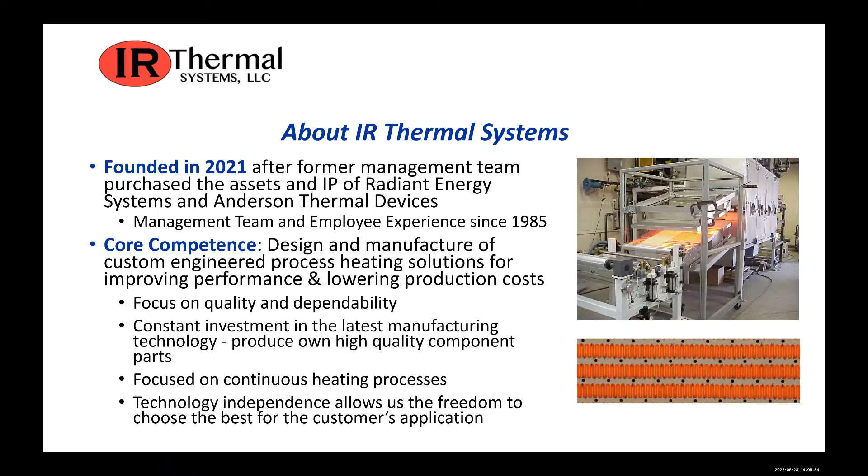Our core competence is the design and manufacture of custom engineered process heating solutions for improving performance and lowering production costs. Our focus is always on quality and dependability for our customers. We constantly invest in the latest manufacturing technology and produce many of our own high quality component parts, which we found is critical to control quality. We focus on continuous heating processes, and the big difference between us and other companies is that we're truly technology independent, which gives us the freedom to choose the best heating technology for the customer's application.

So how do we help with custom process heating solutions? We focus on preheating, drying, and curing applications. We do hot air systems, IR systems and heaters, and combination hybrid IR and hot air systems. For our customers, we increase line speeds, reduce energy costs, and save space, particularly with our infrared solutions. We also do a lot of troubleshooting, leveling out uneven temperature or moisture across a web, and heat selected zones across the web when we want to improve the performance of existing heating systems.

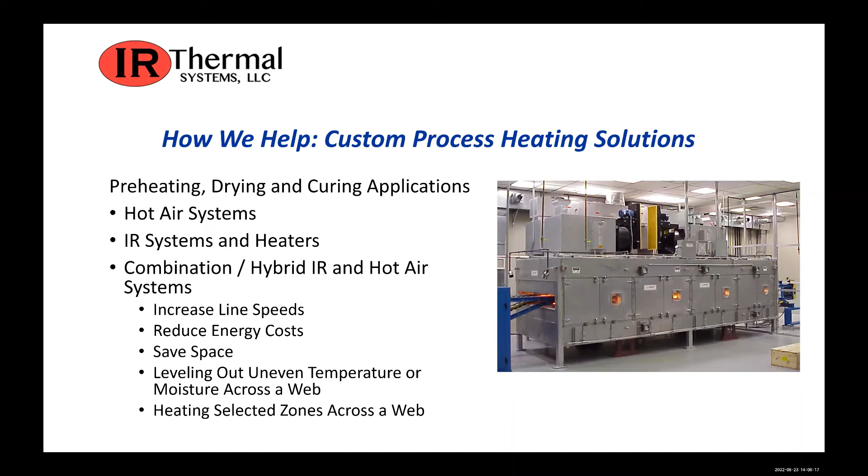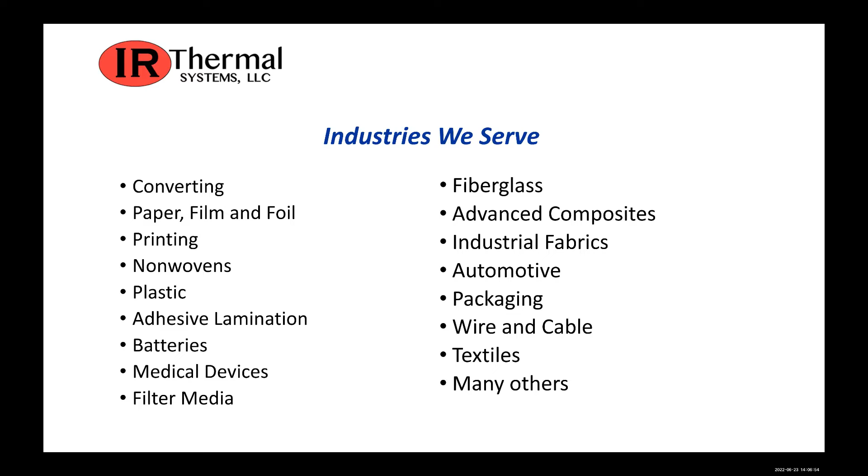So we serve a wide range of industries: converting, paper, film and foil, printing, nonwovens, plastic, adhesive lamination, batteries, medical devices, filter media is big for us, fiberglass, advanced composites, industrial fabrics. We have many automotive applications, packaging applications, wire and cable, textiles, and many other applications. So we serve a wide range of industries over the 35 years that we've been in business, and we certainly can help solve a lot of application problems.

So how we work with your team: we have a crew of specialized engineers that review your existing process. We determine the best technology to use to meet your goals. With state-of-the-art design tools, we develop a system tailored to meet your target specifications. We also have our popular low-cost infrared rental program that allows you to try our technology in your plant, especially since with infrared, you want to tailor that solution for your application. This allows you to do that at a low cost.

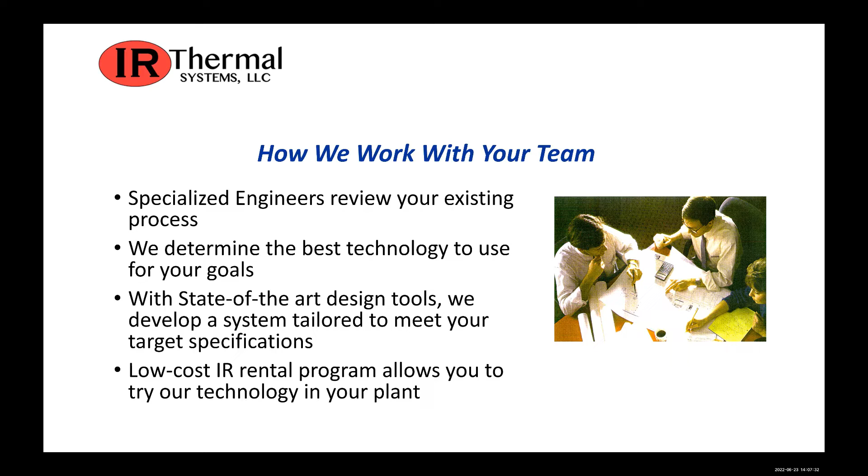We also have project specification sheets that are developed for each type of application. We provide those to our customers to give us all the information needed to properly specify a heating system.

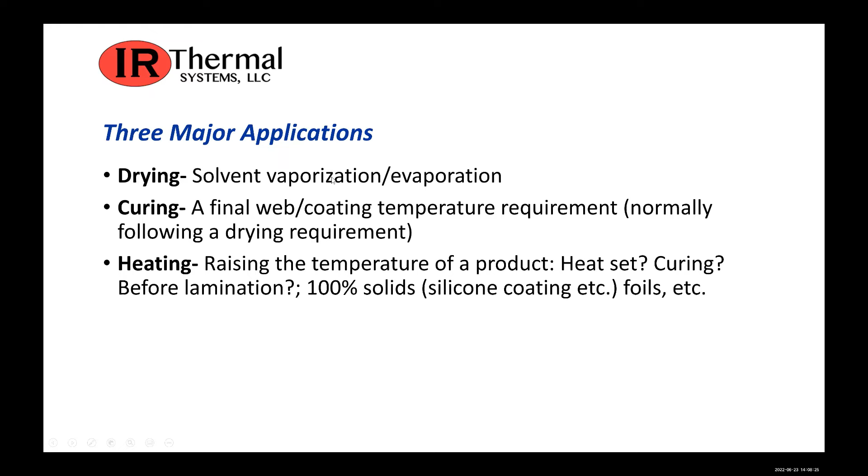So once again, our three major applications: first is drying, so solvent vaporization or evaporation of water. Second is curing, the final web or coating temperature requirement, normally following a drying requirement to cure some sort of chemicals on a web. And third is just basic heating, raising the temperature of a product, maybe for heat set, for curing, before lamination, or just to heat 100% solids or foils.

So let's look at the range of drying methods that we have available. For convection hot air systems, we focus on impingement dryers, flotation dryers, and through air dryers. For radiant heating and infrared systems, we do both electric infrared and gas-fired infrared. And of course, one of our specialties is combination infrared and hot air systems. So in our opinion, each technology has their advantages and disadvantages, and since we are technology independent, we are free to choose which is best for your application.

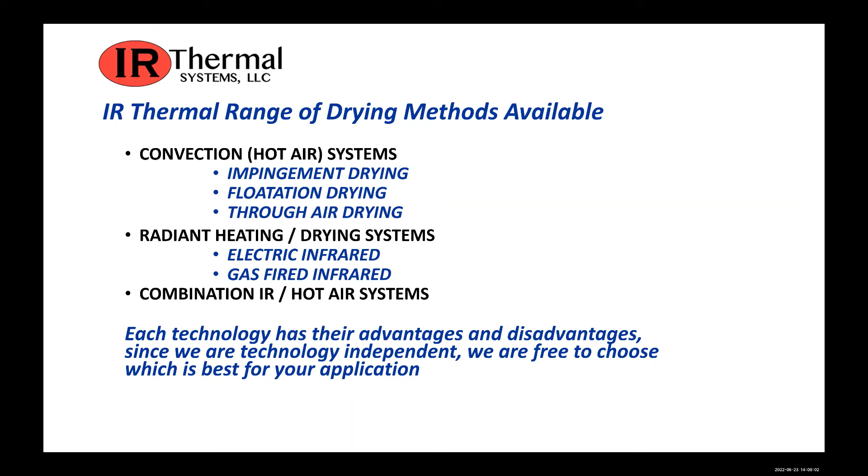So let's start with the different drying methods, just as an introduction.

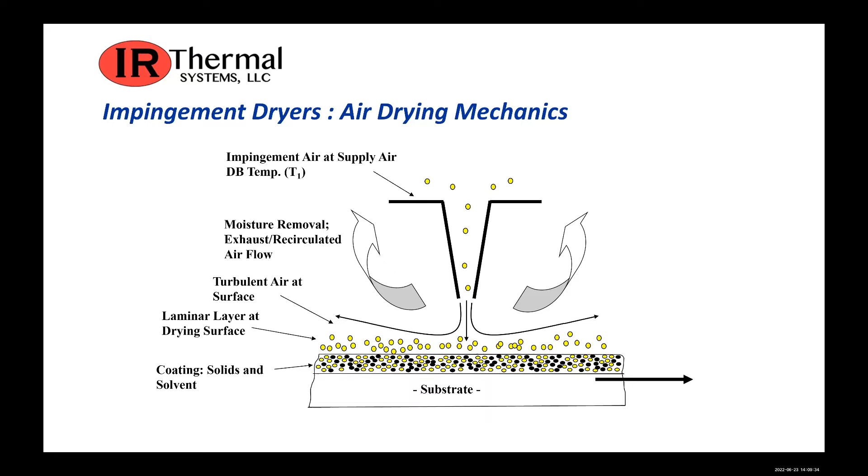The first are impingement dryers. You can see there on the screen how they work. You have these impingers that are basically blowing hot air onto the substrate, onto the web. You have a turbulent air at surface and a laminar layer at drying surface that heats up the web. Air is blown through a nozzle to heat one or both sides of the web. It's typically used for coated and non-permeable webs, such as adhesive tapes, protective films, coated fabrics, architectural fabrics, and other printed materials. It can be easily arranged for multiple heat transfer zones and adapted to different product requirements, and this technology gives you an accurate and uniform control of the dryer temperature.

A couple other aspects that could be seen as disadvantages. This method does require roll or conveyor support, along with the associated initial costs, maintenance issues, and web tension requirements for longer dryers. So there's equipment that you have to maintain with this process. You have the possibility of web scratching or marking from contact with the web support idlers, and it's also slower to heat up or cool down.

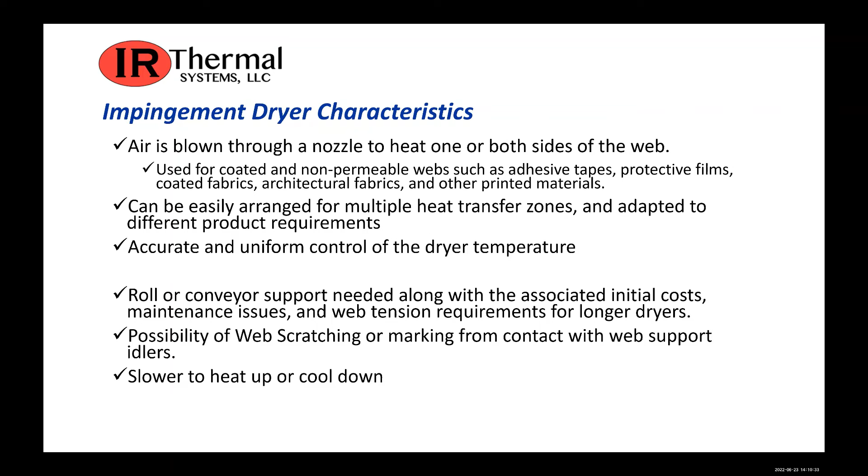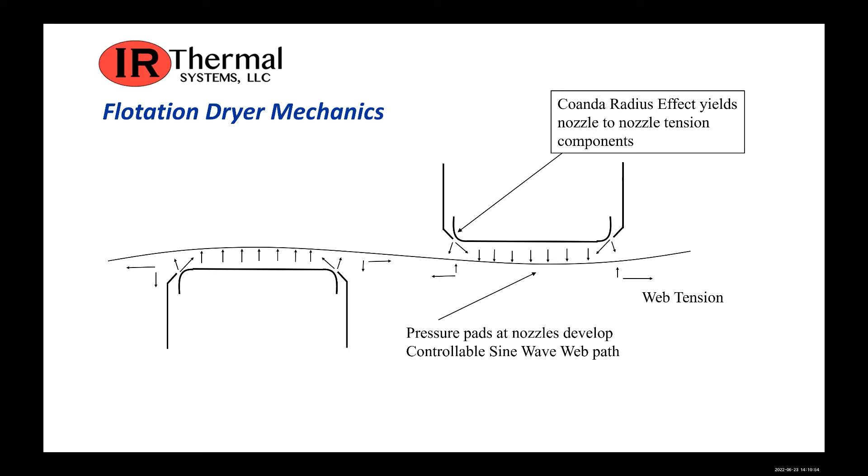The next are flotation dryers. Flotation dryers are a little bit different because the technology allows the web to be transported through the dryer without contact, like a non-contact drying system. So you have some specific advantages to this type of dryer. Flotation dryers direct heated air at the product from both sides, producing more effective heat transfer rates per running length of the dryer. It's used where the web is coated on both sides and for delicate webs that can't be mechanically supported or touched, including filter media and coated film.

Non-contact web support eliminates issues with marking or scratching and eliminates the need for support rolls or a conveyor system. That gives you some cost savings there - accurate and uniform control of dryer temperatures and ease of multi-zone operation. So for most applications, two-sided nozzles with balanced airflow are needed to stabilize the web. That results in a higher dryer cost, offset by the elimination of rolls and reduced overall dryer length. So you also reduce the maintenance of not having all of that conveyor to manage.

You have lower rates of unit area transfer versus velocity compared with impingement, and a lowered velocity and flow balance required to float and minimize the sine effect against low line tension may limit the heat transfer. So some of these might be a little bit longer.

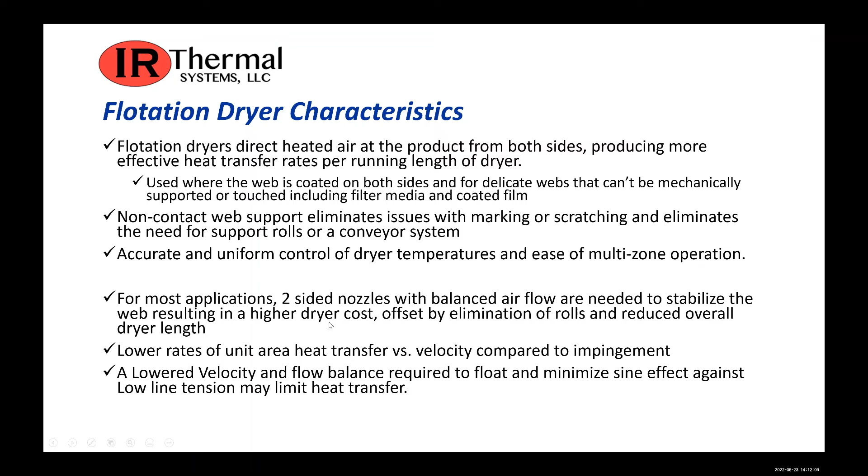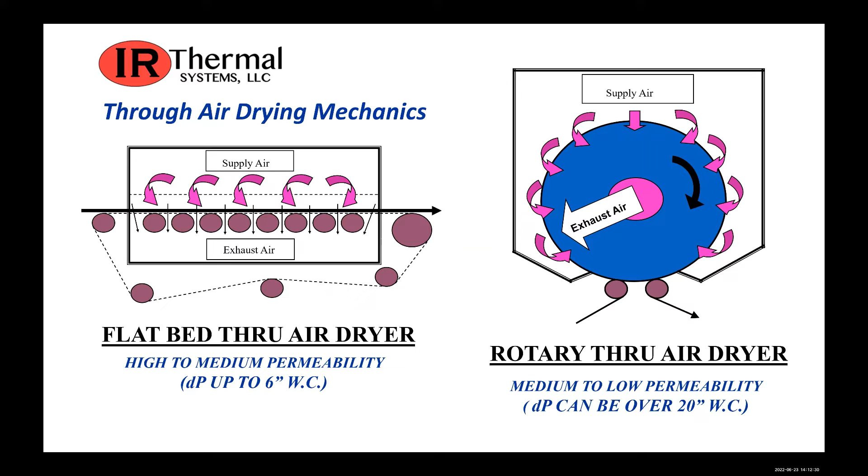We also have through air dryers. We have rotary and flatbed types. This is typically for webs that require the heated air to be pushed through the material itself, and that's what it's normally used for - drying, curing, heat setting, and thermal bonding of porous materials such as nonwovens, textiles, paper, and fibers by the passage of heated air or gas through the material. That means it's really dependent on the material as to how the heat goes through it. In many thermal bonding applications, such as auto carpeting, cotton shoddy, or other recycled materials are mixed with low melt fibers such as polyethylene.

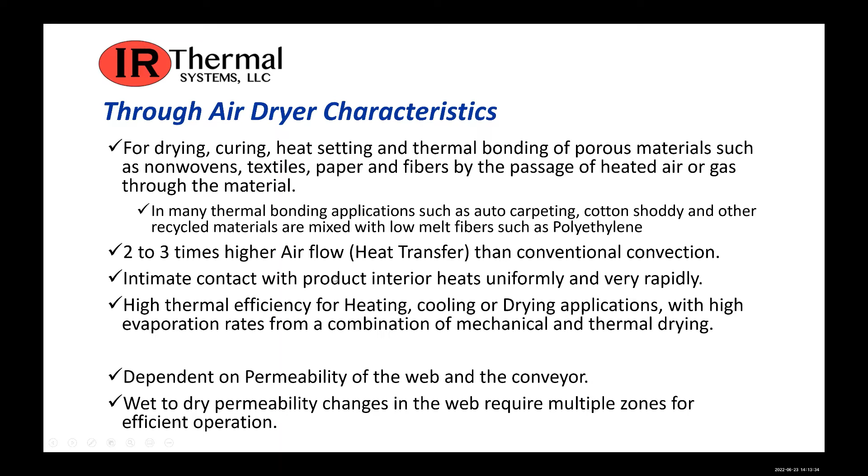It has 2 to 3 times higher airflow or heat transfer than conventional convection. Intimate contact with the product interior heats uniformly and very rapidly. High thermal efficiency for heating, cooling, or drying applications with high evaporation rates from a combination of both mechanical and thermal drying. The quality of the heating is dependent upon the permeability of the web and the conveyor. The wet to dry permeability changes in the web require multiple zones for efficient operation.

So next, we're going to talk a little bit about industrial process infrared heating. In general, infrared heating systems are more efficient with lower energy requirements for the same results when compared with convection type heaters. Energy is directly transferred from the heater to the target object for a higher heat transfer rate. It's available in both electric or gas powered versions, and the heating temperature is dependent on the wavelength.

There are three basic wavelength types used for industrial infrared heating applications. First, shortwave emitters, typically lamps from 2150 to 4000 degrees Fahrenheit. There's medium wave emitters, 900 to 2150 degrees, and long wave emitters, 500 to 900 degrees Fahrenheit. On the right is a short diagram that shows the emitter temperature versus the wavelength. For many of the applications, we want to tailor the wavelength to what is required by what is being heated.

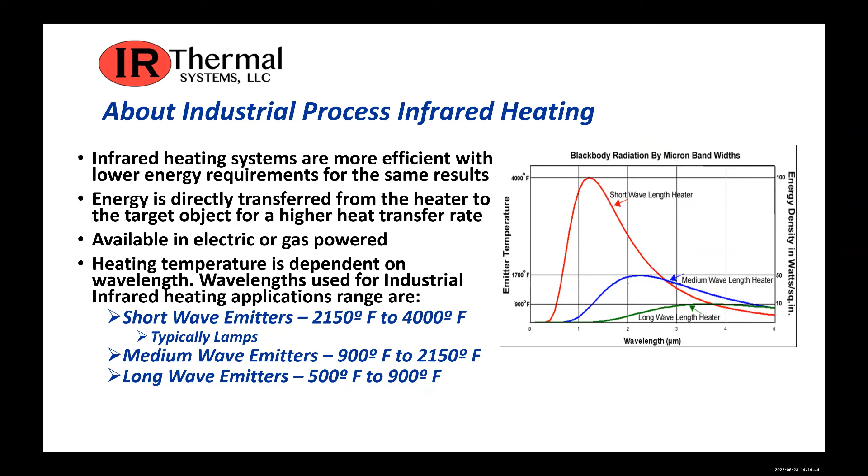So some more characteristics of infrared dryers. They're used for industrial drying, powder coating, and paints, typically for coating, annealing, filter media, nanofilms, battery, and fuel cell materials. So it's becoming more common as people find out more of the advantages for those specific applications. And again, it's really dependent on the application, which applications are better for infrared versus convection type methods.

So for example, plastic for embossing, medium wave infrared directly heats and softens the surface quickly. For water-based coating on film, medium wave infrared directly heats the surface and is the most efficient wavelength for water evaporation - it's really tailored for water evaporation. Can be used for adhesives, impregnated fiberglass, and food applications, and can be used with or without air.

When air is used, air removes the steam generated by the heat and prevents the skinning effect, and also improves the efficiency of infrared. So the air actually acts as a mass transfer to remove the water vapor and steam away from the surface, which is important for a lot of applications, especially ones where there's a lot of water being removed.

Some other benefits: infrared heating systems are easy to zone for uniform heating of the product and width changes. Fast response to changing process conditions, including quick startup and shutdown in most styles of heaters. Lower initial capital and installation costs, including floor space savings, because they require less space for the same amount of heat transfer. It's often added to existing conventional dryers to increase line speed.

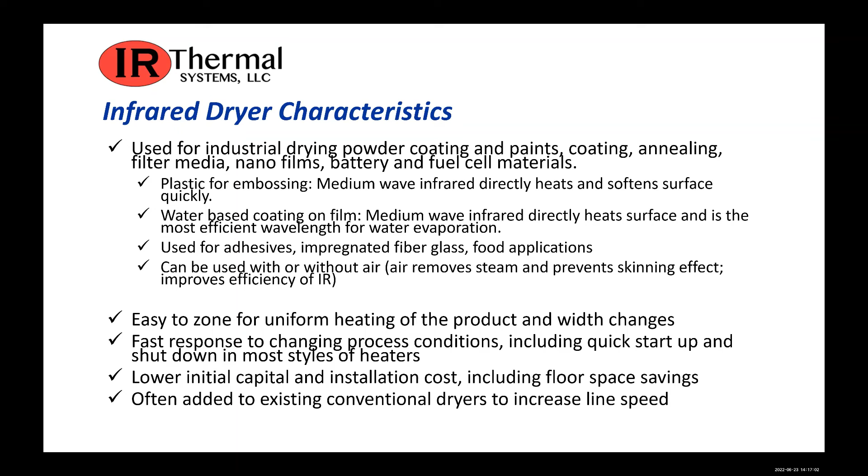One of the things we do well and focus on is improving existing processes and existing heating systems by adding infrared drying elements in the process, either to improve quality, improve issues that existing heaters have, and also to improve throughput of product through heaters.

A couple of specific issues for the electric type: it has a wide temperature range, better turn-down with infinite temperature control and tunability. So you can really dial in precisely the amount of heating that you need if you want to really control the quality of your end product.

For gas heaters, you have a higher density of heat in a small area that allows high temperature and high intensity heat in a small package, up to 50,000 BTU per square foot. It also gives you more intensive medium wave heating, and it's often used to cure powder coatings on any substrate.

The choice of gas or electric might also be made by local energy costs. We've even done combination gas and electric to get specific process qualities that our customers have required. It is, however, essential to run trials in the lab or on a pilot line to confirm dryer sizing and the desired finished product quality.

I want to mention that we offer a rental program that allows customers to deploy infrared heaters at a low cost to learn. That's important because with any new technology like this, if you're not familiar with it in your plant, it's going to take some time to learn how to use it, how to tweak the temperature, and also how it affects the ultimate quality of the product you're making.

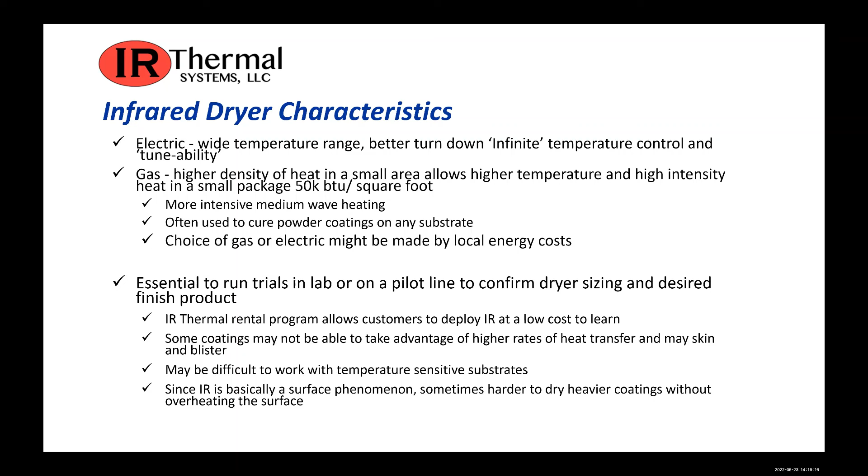Some coatings may not be able to take advantage of the higher rates of heat transfer and may skin and blister, and may be difficult to work with on temperature-sensitive substrates. Also, since infrared is basically a surface phenomenon, sometimes it's harder to dry heavier coatings without overheating the surface.

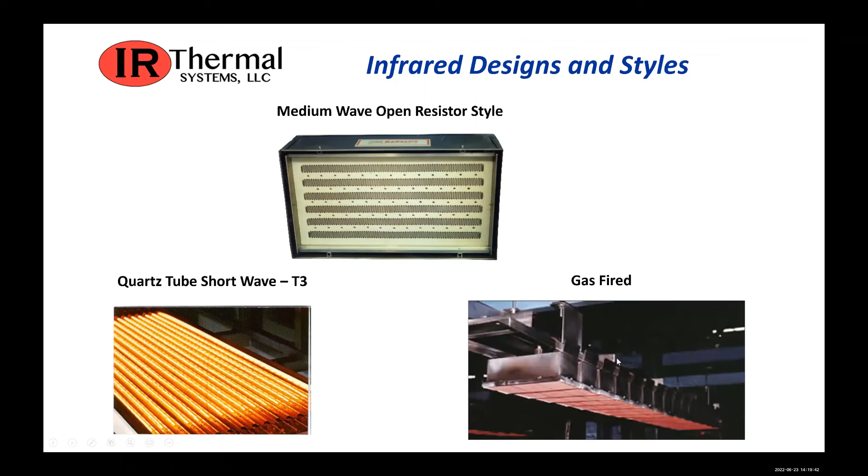Here's a couple of our designs and styles. In the middle of the top there, medium wave open resistor style, these are the type of elements we make in-house, which we're very proud of. We also have quartz tube short wave on the bottom left, and our gas-fired heater types on the bottom right.

Many times our infrared heaters have really been used to solve specific customer quality problems, and there's a couple I just want to mention as we close out the presentation. We had one customer that had trouble with plastic bottle annealing, so we strategically placed infrared heaters in their process that were added to eliminate cracks during bottle handling.

At another customer, preheating heavy commercial vinyl wallpaper, we installed IR heaters strategically in the process to evenly heat the paper across the entire surface, which greatly improved embossing quality. Those are the kind of problems that we solve as a company, and the things that we do for our customers in the heating space.